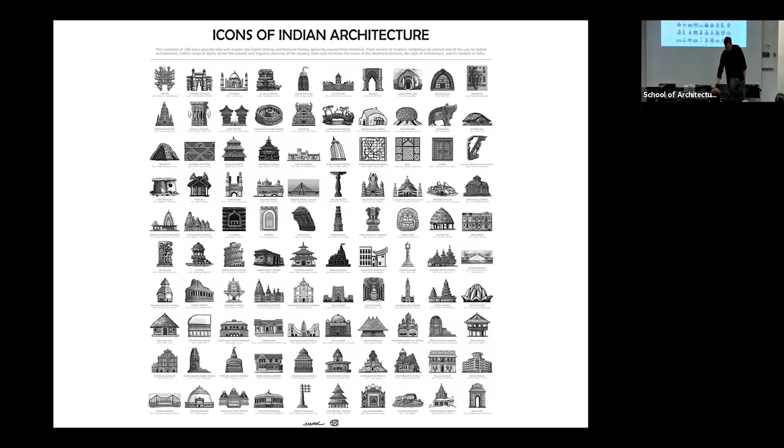symptomatic of development throughout the world. Really, I mean, it's not something that is peculiar to India.

And you're also asking yourself that in this context of urbanization, what is the mandate or what is the role of an architect?

To step back a little bit, I'm going to look at the role of the architect over time. In 1947, when India achieved independence, the architect was this kind of nation builder, a part of the entire project of building India.

In 1975, when the emergency happened, a lot of mandate was taken by the authoritarian figure of Indira Gandhi, who was the PM then. The architect and other professionals started losing some of that fire, that mandate, or that social will to be part of implementing change, because the state became extremely dictatorial.

Then in 1991, economic liberalization brought the market economy to India. India, which had largely been a socialist-driven economy till the 1990s, had its economic borders open up. With this inflow of capital, you end up getting an incredible rate of change. Impatient capital, as Rahul Mehrotra calls it, dictates a certain speed in the implementation of the global or economic project.

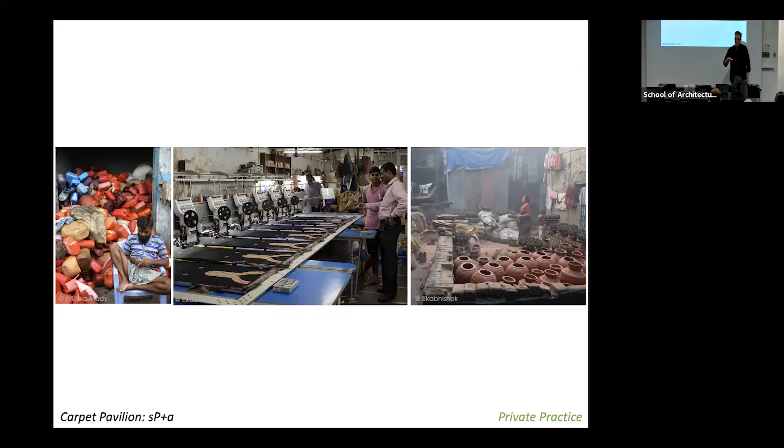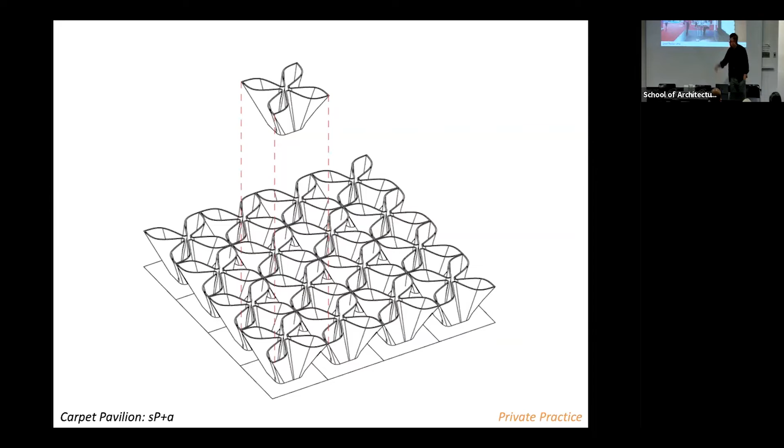The first of these is the idea of a traditional practice, where a client comes to us to do a project. In the case of this carpet pavilion, while doing that project we also looked into means of production that the city has, latent ones not necessarily forgotten but slowly disappearing over time. We worked with what is, in some sense, a kind of craft to create this pavilion, which uses waste carpet but also reinvents the life cycle of that carpet.

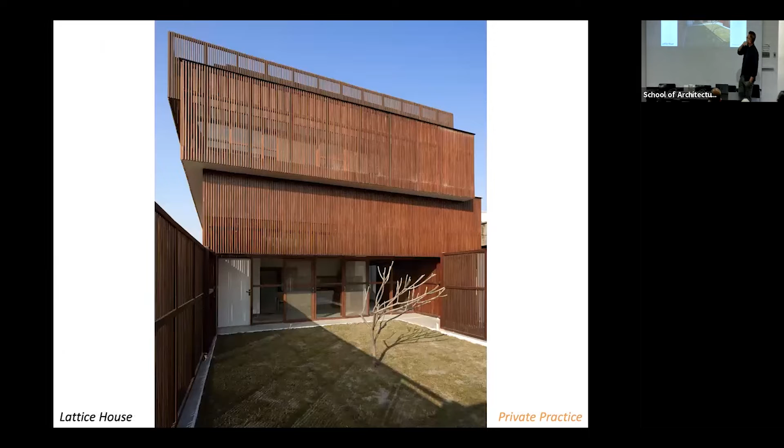Or in the case of a project like this, where we built a house in northern India in a peri-urban context, the architecture of the house itself becomes a means for us to start suggesting a kind of ordering of what seems to be an extremely haphazard edge to the city as it is today.

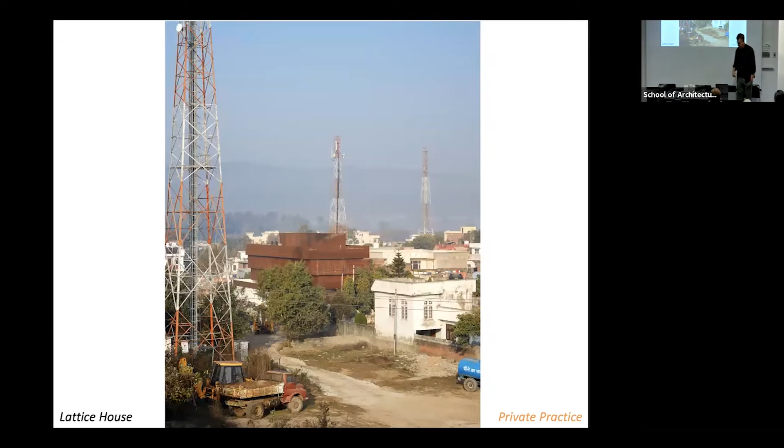The second model of practice we typically move through is this idea of a collaborative practice. In the case of this small temple that we designed, temples are actually extremely embedded in the cultural memory of the people who go to these projects.

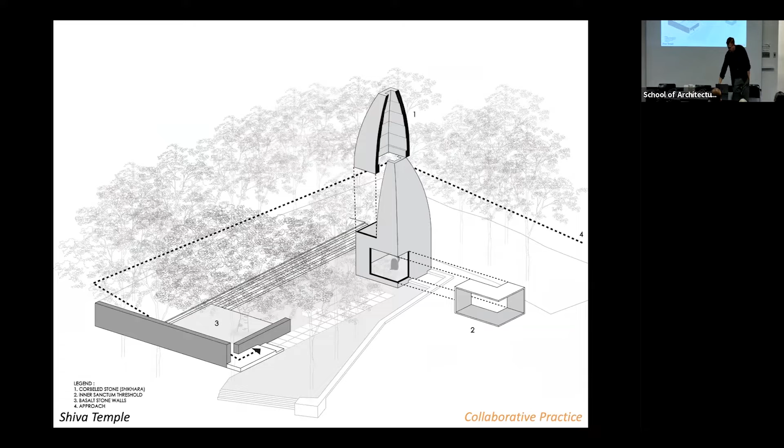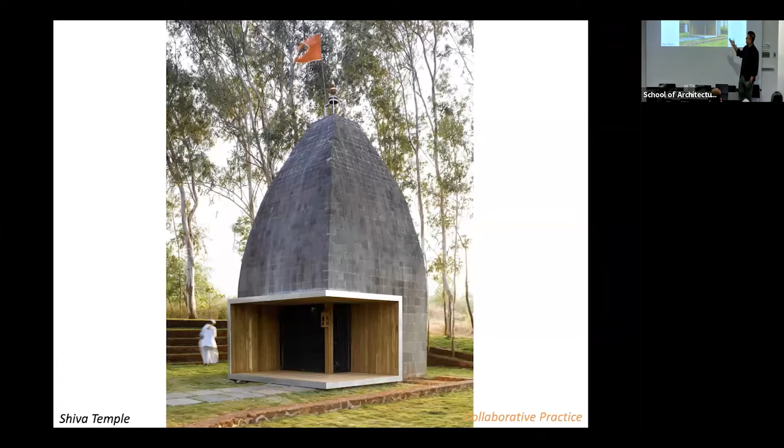Here we worked with a group of 3 villages to design and build a temple out of stone, using techniques that had been forgotten. We were, in some sense, editors trying to look at a model of design and build that would have very active involvement from the people who were going to use the project. The villagers actually built the project themselves, which took a little more time, but it also created a sense of belonging that would have been difficult to create otherwise.

The third model of practice operates through this idea of collectives. What we've done is structured a group of 6 practices that look at doing only public projects for the city of Mumbai, where many times this work is pro bono. We are trying to create another level of engagement that doesn't exist in the city today, where the government literally hires contractors to do city projects without any kind of design intervention.

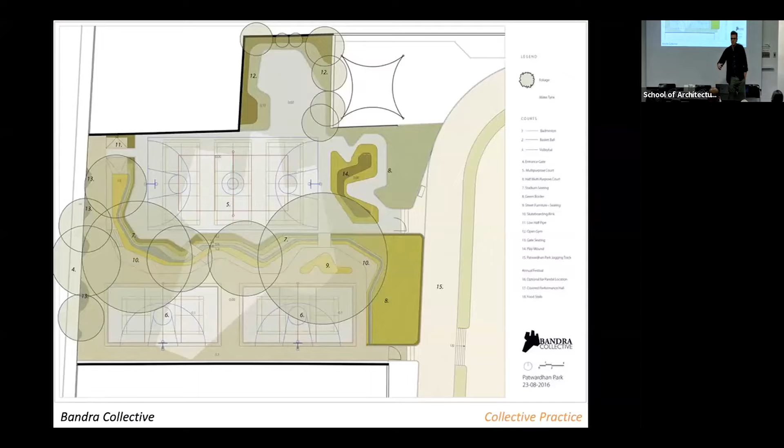So what we've been trying to do as a group called the Bandra Collective is work with resident groups to do design interventions like parks, but also to do advocacy projects where we look at infrastructure, for instance this massive coastal road being built along Mumbai's western edge that will completely cut the city off from its waterside, and to bring these images into public domain to build resistance against projects like this. That's the third model of practice, the idea of the collective.

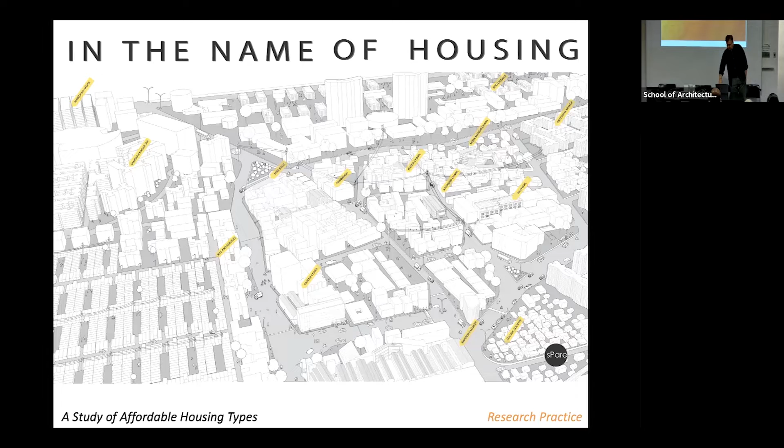The last model of practice is this idea of research as a mode to operate through, where there's an incredible lack of information on our cities. What we're trying to do through this project is address this idea of housing and affordability, and how there already existed certain models of housing in Mumbai that have been forgotten or glossed over, and to try to learn from those models and bring that idea back in a projective sense to look at the design of affordable housing going forward.

So those are the four models of practice, but it's not like these models operate individually or are siloed. They also constantly inform and learn from each other.

The second part of the presentation talks about projects that lie beyond the urban, in some sense. Lefebvre said this back in the 1970s, that however disconnected you might be from urban centers, you're still part of urbanization networks. So that's really interesting.

But what also happens is, as architects, our only intervention within this kind of context is through projects like second homes and farmhouses, because the rest of the country—and now India is 35% urban population, only 35%, 65% is rural. And if you look at what that means in terms of development indices, there is a huge disconnect.

Yet India is one of the few countries where it's mandated by law that companies above a certain scale must compulsorily spend a certain amount of their profits as CSR, corporate social responsibility, investing that into social projects to improve society. All of this money is put into use, but it's not articulated in a way that creates systemic benefits.

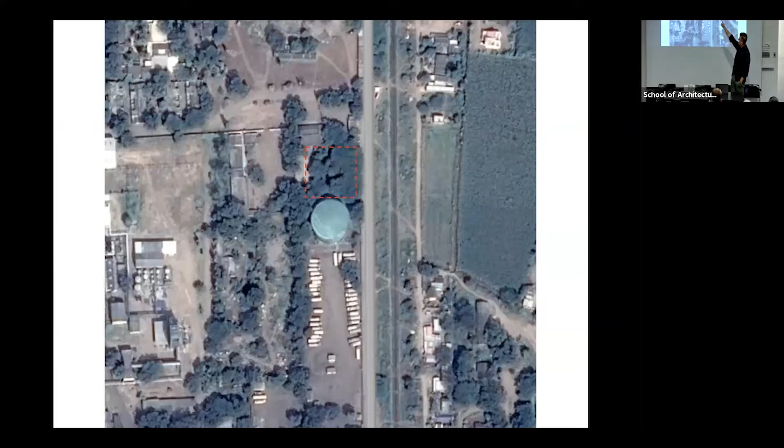While we were trying to develop an architecture for this site, because of the dense foliage, we were also trying to see if there were clues that we could pick up on to create an architecture that, while being internal inside, also visually links you to the foliage of trees outside. So this is a small guest house close to our site that we experienced, which led us to this idea of reversing the insertion of the architectural section within that space.

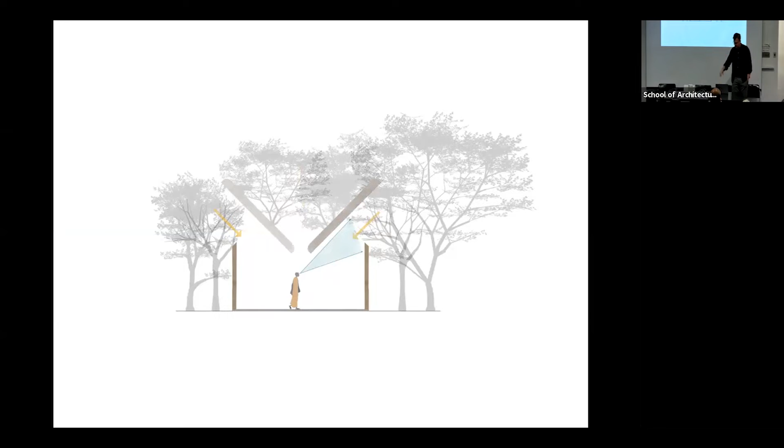As a planning idea, it's very simple. It's really just a series of two halls, one a meditation hall, the other a skill development center, a little admin block, and three dormitories for teachers to stay in. There are two courtyards that structure the entire project.

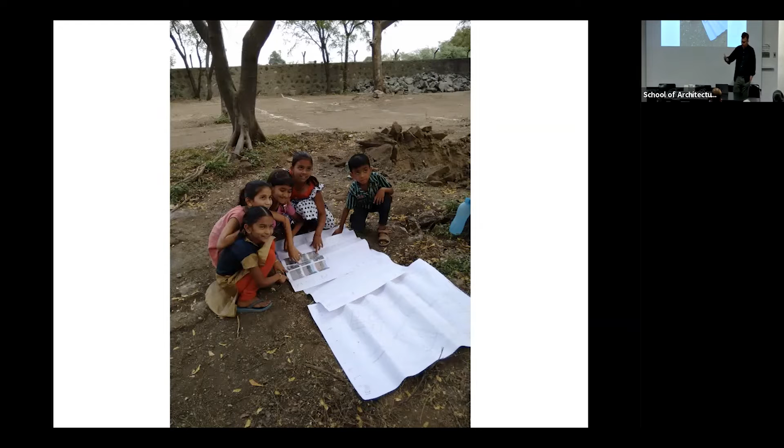We worked extensively with the local community to show them what we were planning to do, and had a lot of back and forth with them. We brought in Hunnarshala, a group that won the Curry Stone Prize here back in 2008 or 2009. They essentially train local communities to work with local material to build, and that's the kind of material ecology of the project we developed with them.

We ended up using waste stone dust from a basalt quarry close by, along with fly ash from the plant, to create walls that were rammed stone dust walls. So they are basically volcanic stone dust walls rammed in place to create a new material which we hope will become systemic for construction in this area.

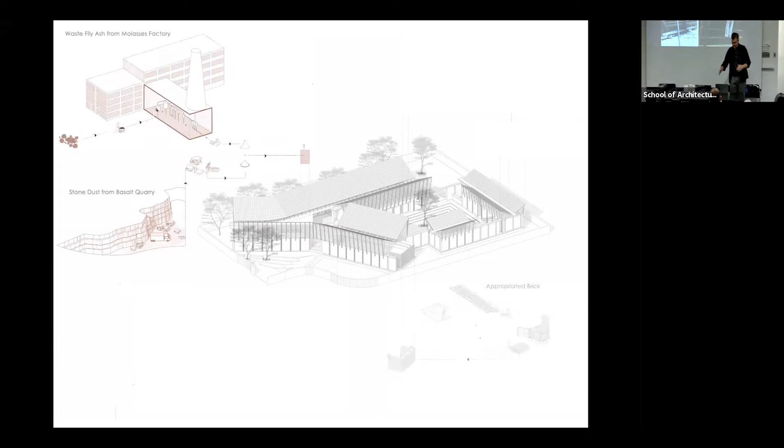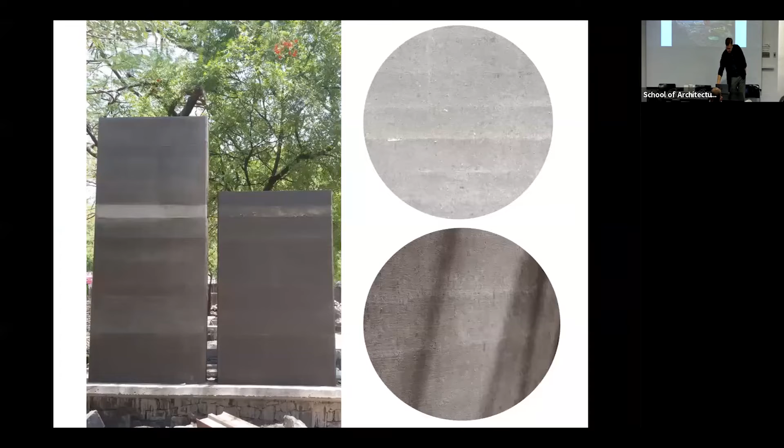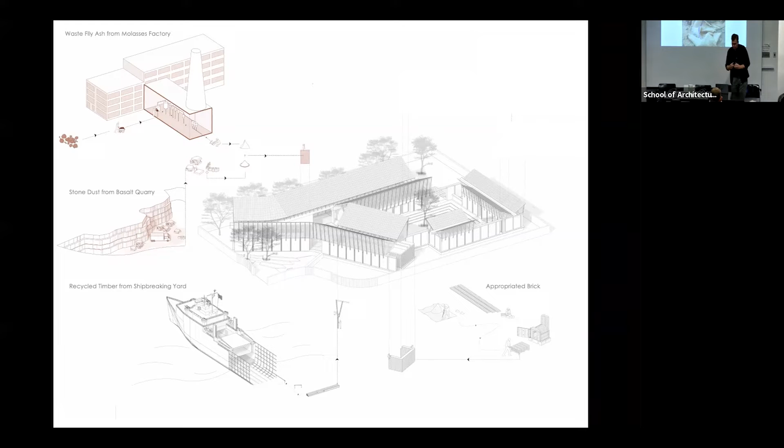These are images of those shipping vessels that were broken, and the wood that came out of it. That's the wood now on our site being structured into a roof, sitting in the middle on the gutter. The entire underside of the roof is made of old jute bags wrapped around a twig and mixed with mud to create rolls of mud that become insulation layers underneath.

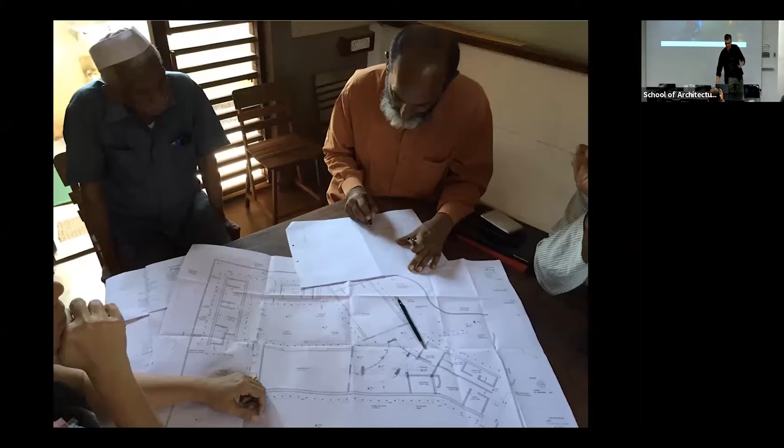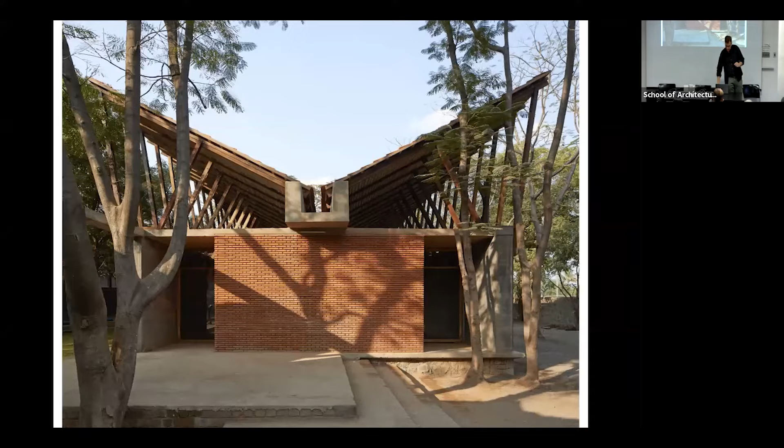That's the concrete gutter sitting on the brick pier. It's a very clear structural diagram, but what it allows us to do is also carry all that water away to harvest, because this is an area with very little rainfall.

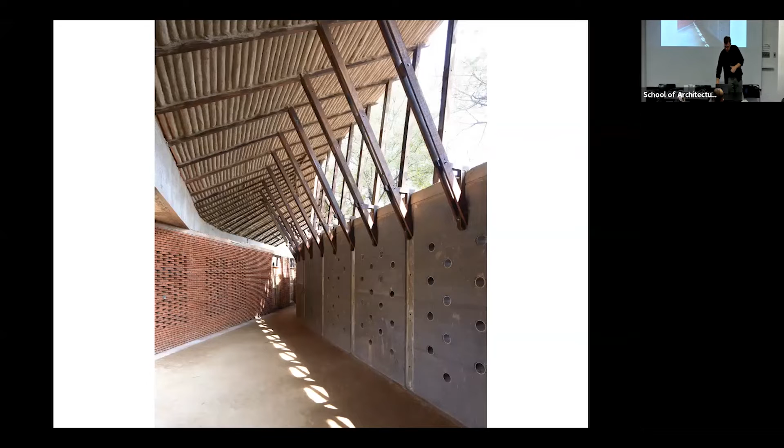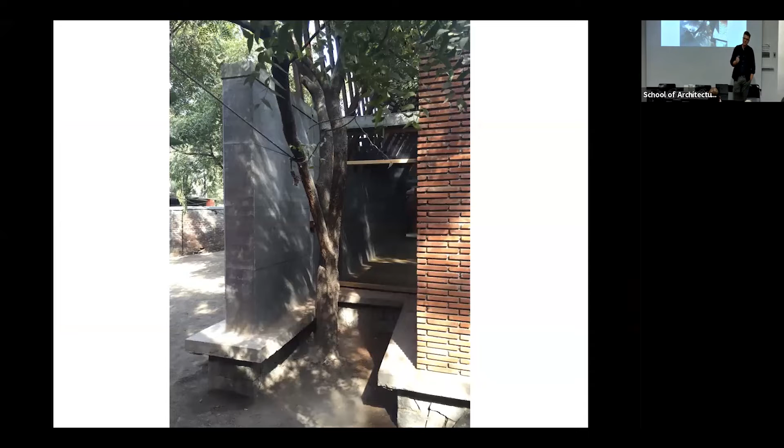What we've also done is that while the structural diagram is very strict, it still allows us to respond to trees that sit within our site, which are the most important part of the beginning of the project, because the trees obviously were there before we were. Jetavan is also a kind of holy grove in Buddhist mythology, and we tried to work around all these trees.

And they manifest in various places. The entire structure really responds to the presence of those trees, and you can see how some of those spaces are, and how that entire courtyard really becomes a kind of social space for people to use at various times of the day.

The second project I'm going to show is a library we've done as an extension to a small school, again in rural Maharashtra. While building this library for children, we were trying to think about what children relate to more. Is it a vertical building or landscape? I mean, the answer was the fact that even as an adult, if I was to look at a berm or a mound, my first impulse would be to climb on it.

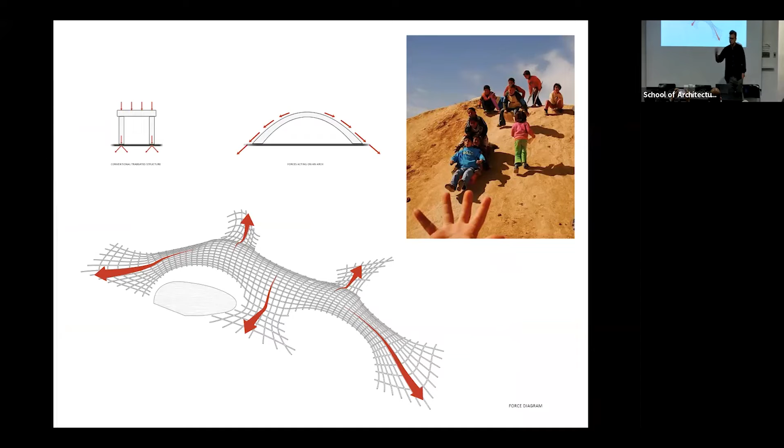And we set out to do exactly that. We set out to create an architecture that was also simultaneously landscape. But to do this, we ended up going back to 16th century Spain, the Catalan tile vaulting system — Guastavino built all of that. And then we looked at how Eladio Dieste in Uruguay was also doing these tension ring details, which allowed us to do these compression structures in brick. Then, using form-finding software from ETH Zurich, we were able to calculate the compression in this building. And finally, using local material in Maharashtra, we were able to build this project in India.

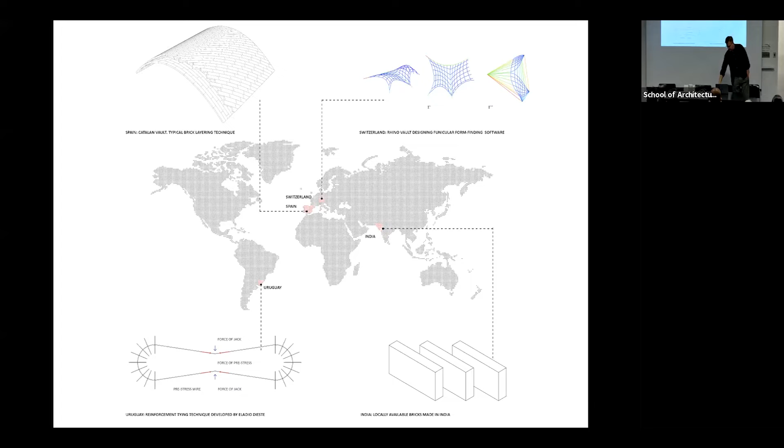So the point I'm also trying to make here is that the global and the local are no longer in opposition. They don't need to be. We already sit on knowledge networks now that allow us to use knowledge systems that might exist in different parts of the world, but could make the local richer if we think about it that way.

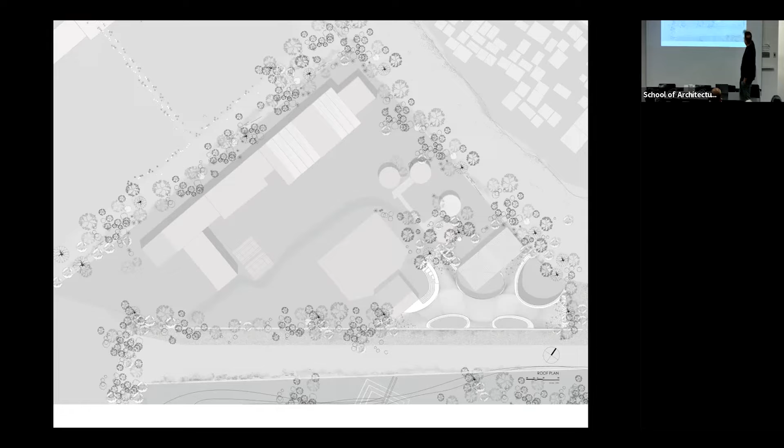And this is really a site plan of the school. This was where our site was located. What we were trying to do was imagine the library to be really a kind of crossroads for students from the upper part of that school to move to playgrounds that sat on this lower edge.

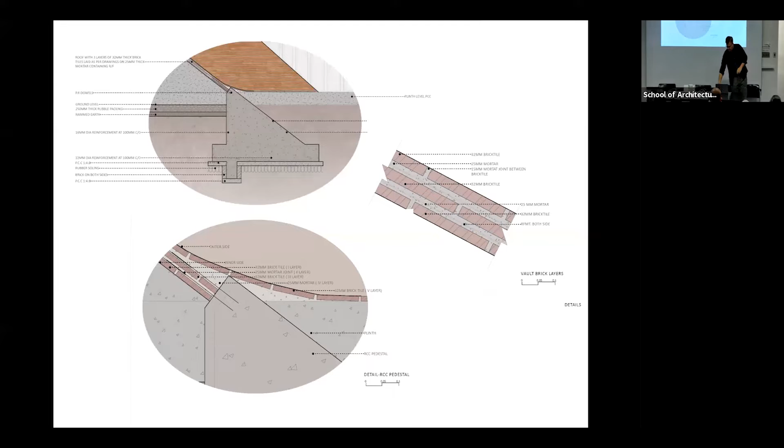So we really were trying to see if this building could also be a pavilion of sorts that people could move through. These are just some drawings of that. It's really a simple construction technique of three layers of brick tile that are always in compression. And these are some mock-ups of the initial project with testing.

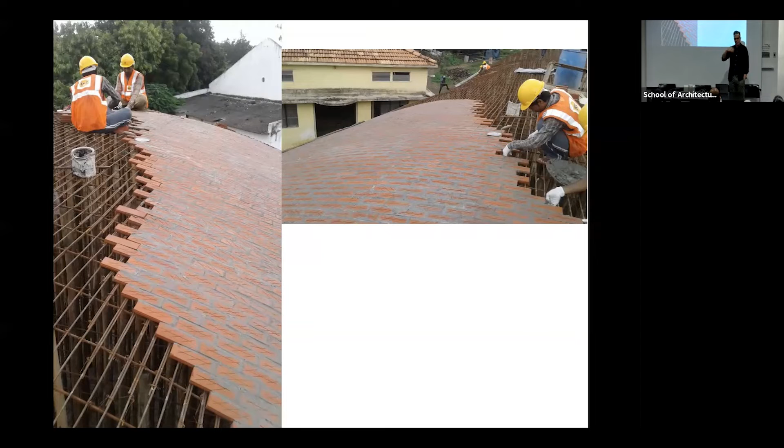As you might know, when you do a curved structure, the most expensive part is the formwork. What we did here was actually use rebar as formwork — once our first layer had settled, the contractor removed the rebar and used it to construct another project at another location. So our formwork cost was zero. That's really, in some sense, the frugality that becomes extremely important when building in a context like ours. And this is after those rebars were taken off.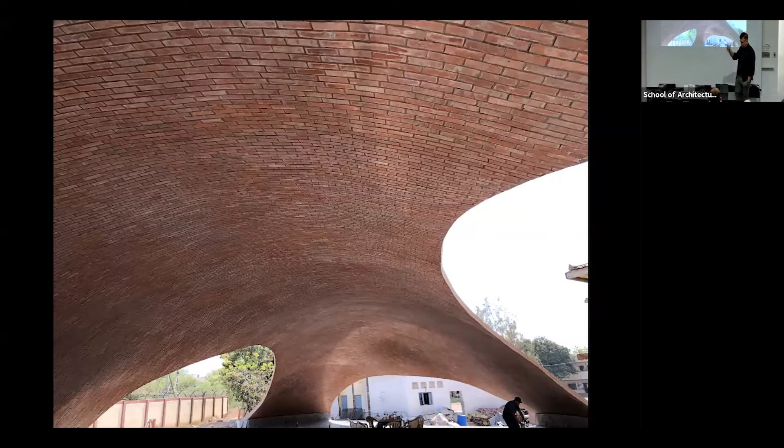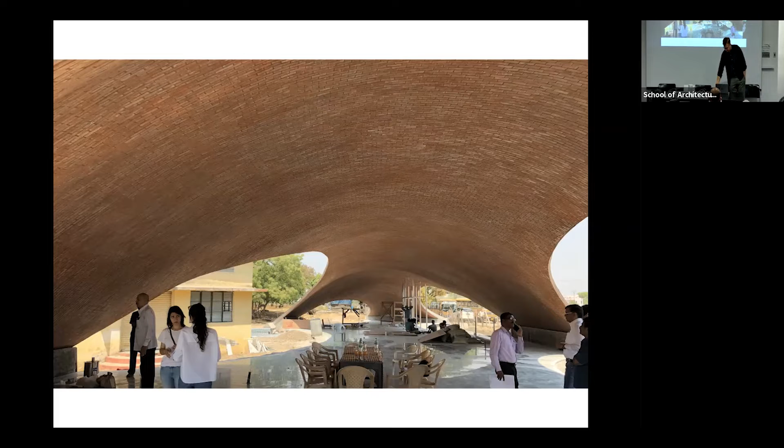The shell is 150 feet long, about 25 feet at its widest, and 4.5 inches thick, without any steel — completely in pure compression. So the building really becomes a kind of landscape project.

What you see here in the interior is that the windows were designed in a way that allowed us to create natural ventilation within the building. The upper layer of all the fenestrations is mesh, so it allows air to move through, and the lower layer is glass. Also, because we articulated the edge of the windows, we were able to use thinner sections — so we used less material than we would have if the entire thing was one continuous line.

Also, because it's completely in compression, we couldn't anchor any of the windows to the top, so all of the windows are actually anchored to the ground. If you look closely at some images, you can tell there's a slight gap between the window and the entire ceiling.

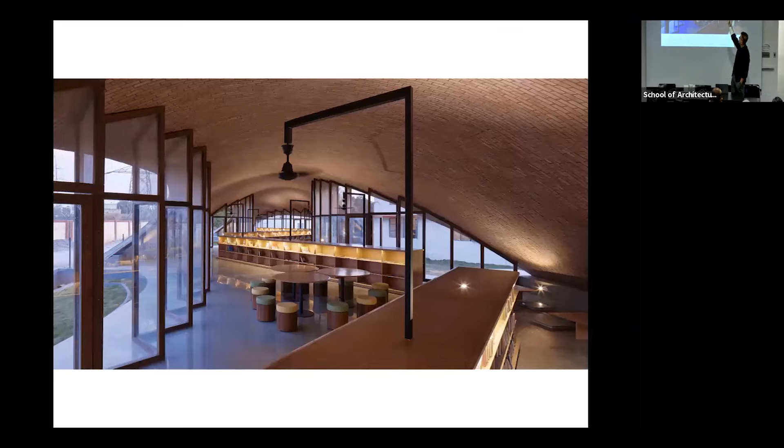Various scales of spaces for kids to sit in and read. And also things like the fan are built off the book stack, because we didn't want to touch the roof of the building. And you can see how that works.

The third project I'm showing within this category is another temple that we actually built. It's again in rural South India, built within a context that is agrarian, but also has a big steel plant and cement plant there, for which they're quarrying. You can actually see these little quarries with water accumulating in them, because the quarrying process itself needs water to cut through the stone.

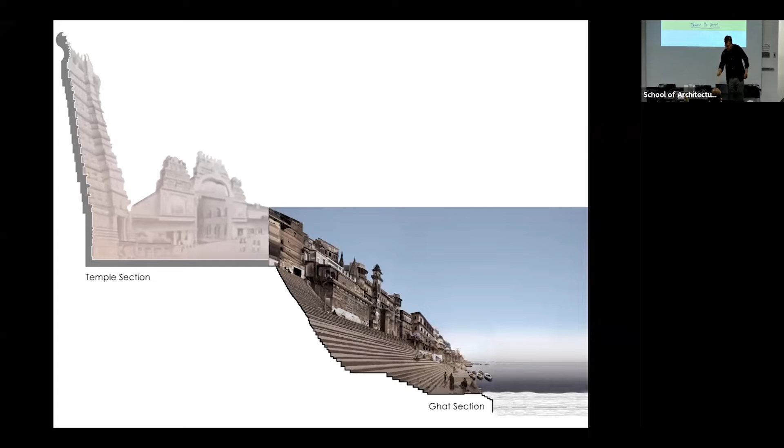So what we were trying to see when we were designing this temple was if we could use that water that was being generated as a byproduct, just evaporating within the body of the temple. We also went back in history to see how this relationship between water and land within traditional temple architecture in India is very critical, whether through the idea of the ghat or the kund, which is a step water body. So we were really trying to see if we could begin with this idea of that step between the water and the land, and see if that could become the architecture of the temple itself.

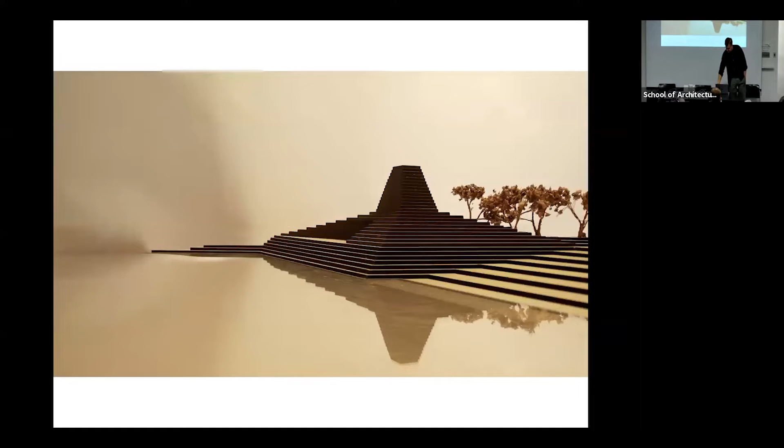In terms of a plan, it's really very simple. You enter towards the left. There is a traditional east-west axis in which the main deity sits. There is a smaller deity that sits towards the western edge, and on top there is the priest's quarters with a little kitchen where the food is cooked to give to all the devotees who come through this temple.

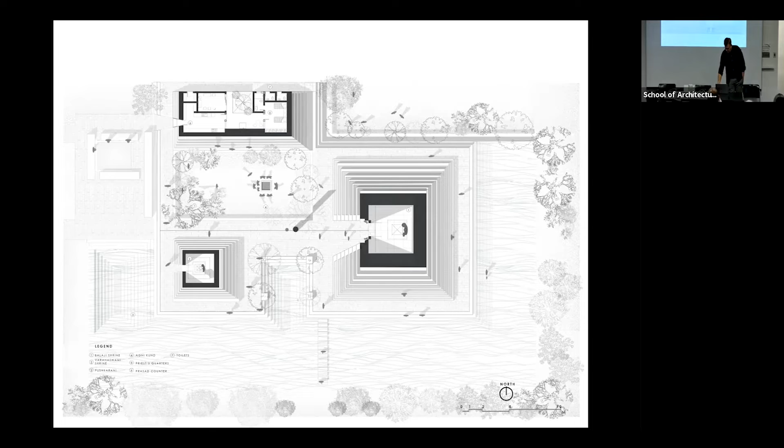And while we were doing that, we also structured the low-lying area around our temple project to become a receptacle for all the water that was coming out of the quarrying process. So that water is basically used to recharge groundwater in this particular area, and whatever excess water comes out is then diverted to the farmlands around the area to help the farmers irrigate their crops.

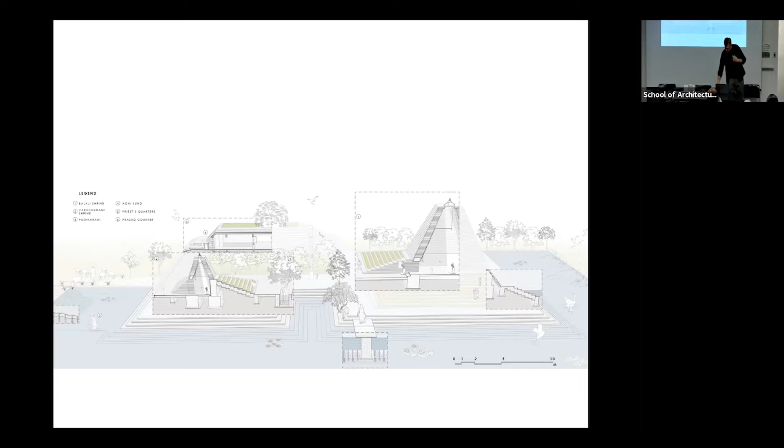So again, the program is really just a very simple temple project, but what we are able to do is add layers of other programs that are not directly related to the temple program itself, but have a relation within the context that we are building. It allows us to create a kind of connection to the people around the project that would be difficult for us to do if we hadn't added that layer.

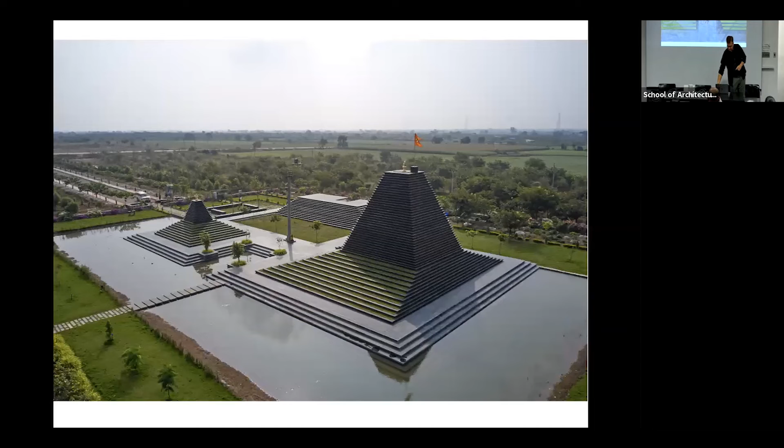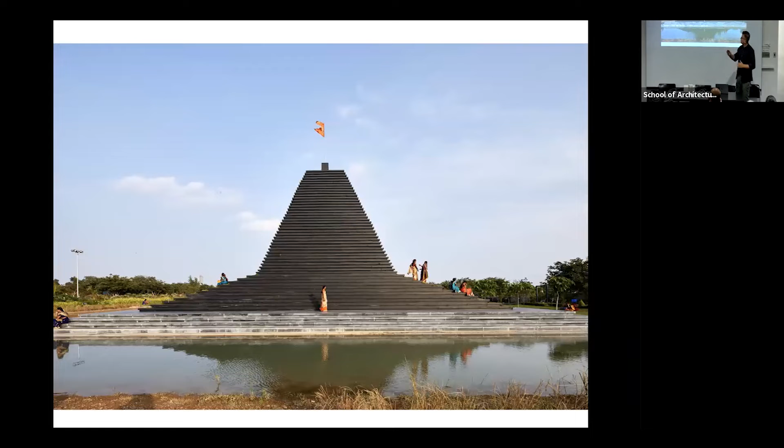And what Vladimir actually said in the beginning, it's really important for us to be able to let people take over the project. Finally, when you look at temple architecture, there is a certain distance that the user has from the deity or from the object. But what we are also trying to do by introducing these steps is to be able to, in some sense, change that distance, to create a much more intimate experience between the user and the actual project itself. So it also becomes a kind of amphitheater looking outwards.

This is a kind of drawing of the project where we were also trying to talk about how these cultural elements of the temple and its planning really become a means for us to connect back into the landscape through the device of water and its cycle.

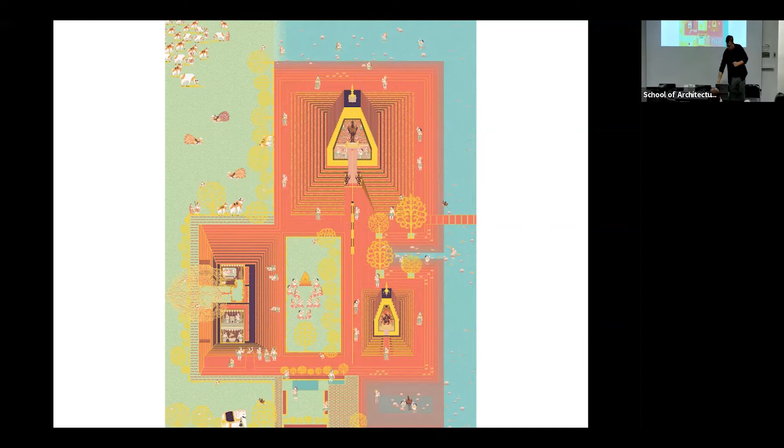The last bit of my presentation looks at the city itself. And as you know, there have been so many conversations on the city. Rahul's talked about the kinetic city. There is Richard Sennett's talk about open cities. There are some books on Bombay, like Maximum City, that talk about the kind of dynamics of what makes a city like Bombay operate. And while there are these incredible definitions of what Mumbai could be, there is also evidence of various kinds of programs that are emergent, that talk about the dynamic of a city like Mumbai, separate from a kind of top-down planning concept of what Western planning typically comprises.

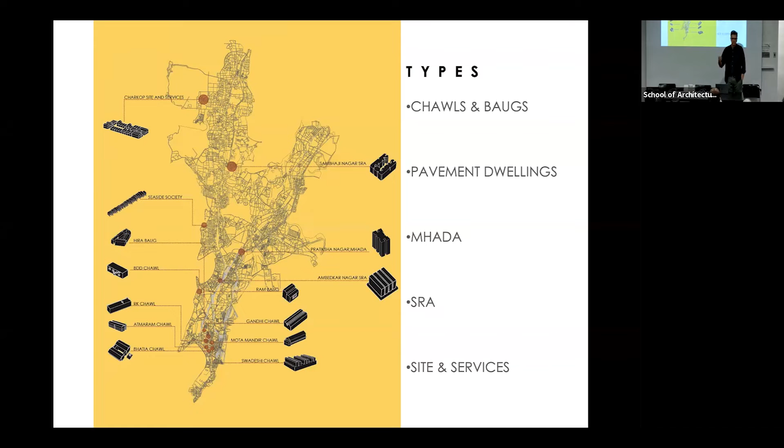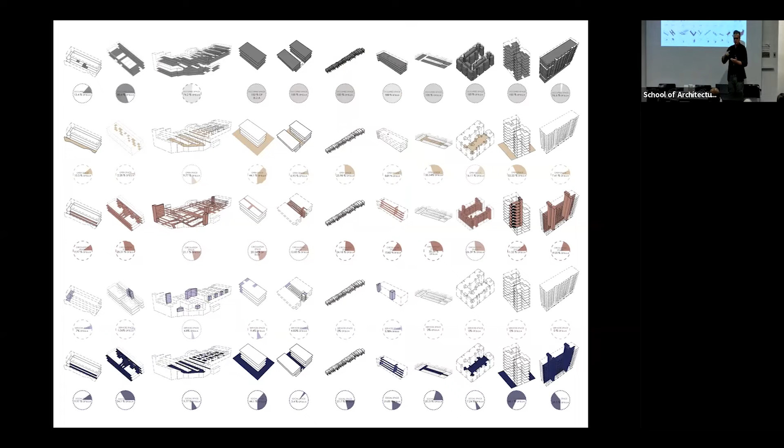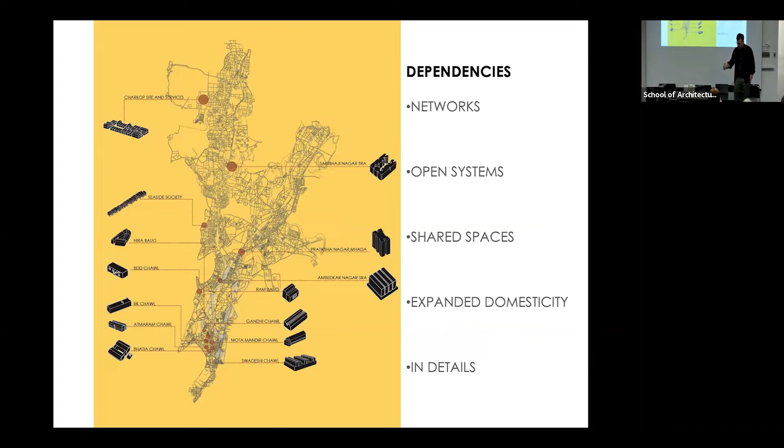To look at this notion of housing, what we started doing was going back into the history of the city to find what were the kinds of models of housing that already existed for the past 150 years, and to see if we could dissect them, analyze them, look at them through the metrics of social space, of movement, of unit size, of unit change over time, to find commonalities that suggested a new way of looking at affordable housing within Mumbai.

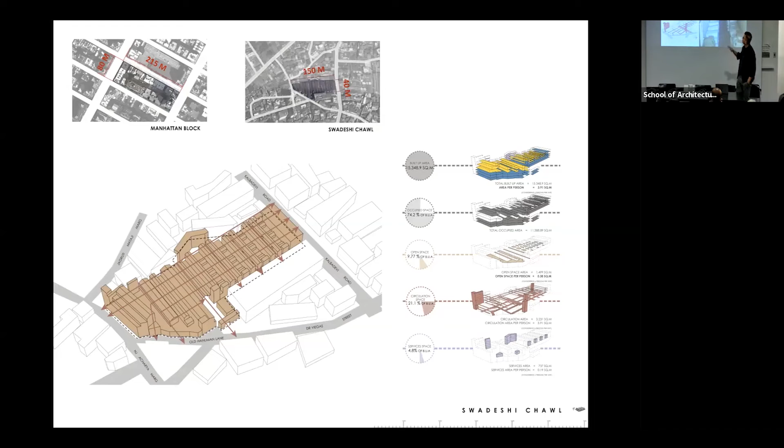Some of these projects are incredible. This is a mixed-use project, roughly 3/4 the size of a Manhattan city block, owned by a single owner. It's got a market street at the bottom and residential units at the top. What's interesting is, as opposed to other similar mixed-use developments in the city today, here the streets actually allow you to shortcut from one part of the city to the next. The city does not stop at the edge of the plot. It actually continues all the way through.

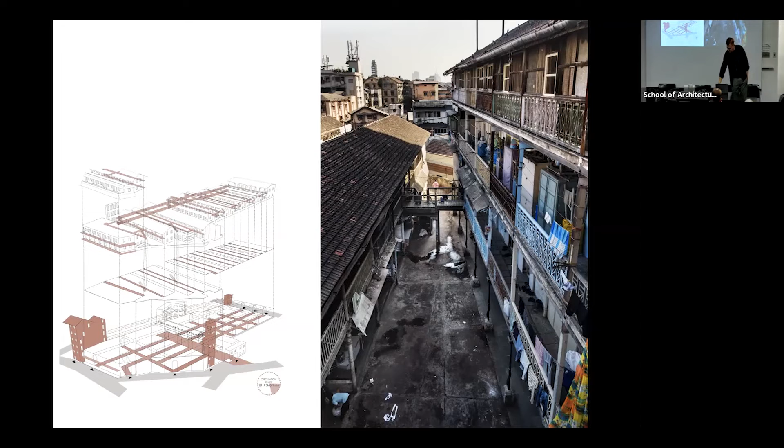And above, you actually have these residential units that have courtyards in between them and bridges that connect you across. Built in 1896, 1898, it still survives today, and it's an incredibly beautiful project, but phasing out shortly. So the idea of networks was important in that project.

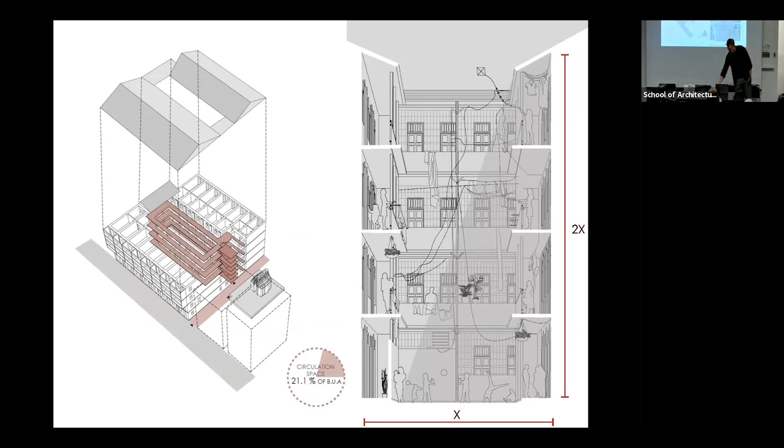In this project, which is a very simple courtyard unit with corridors on both sides and units across the corridor, the critical part was that people spoke about how, when they stayed in these units, despite having formal housing with an elevator in another location, they still preferred living here in a walk-up, because if they had a problem, they could call out to anybody, and people from any floor would come and help them. This sense of community was something they clearly understood was not available in new developments within the city.

We also found this idea of a proportion, a width-to-height ratio, that allowed people to communicate easily across that courtyard. That was extremely important to develop that kind of social infrastructure.

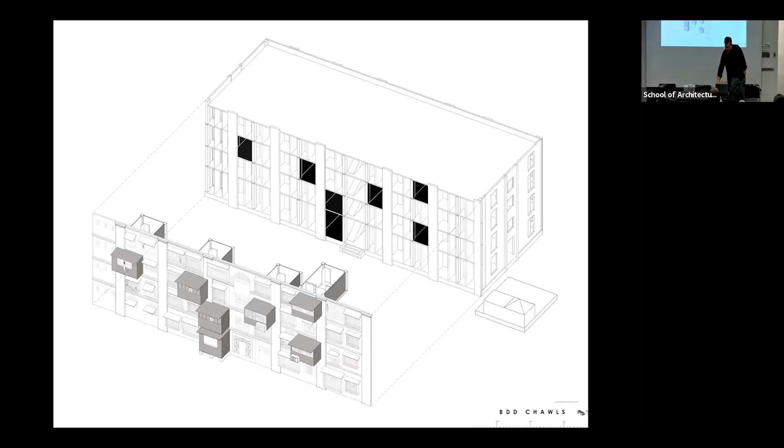Or in the case of this housing that was built by the state, over time there has been a lot of change in the housing itself, where people have gradually extended their homes, coming outwards, adding units, such that the entire facade of the project is actually a study in almost an architecture of extension, of being able to accommodate new programs that are added. So what you actually see here are new rooms that were added to an existing unit inside by the residents directly. And if you think that this is very sporadic or organic, it's actually a very structured and precise way of creating additional programs.

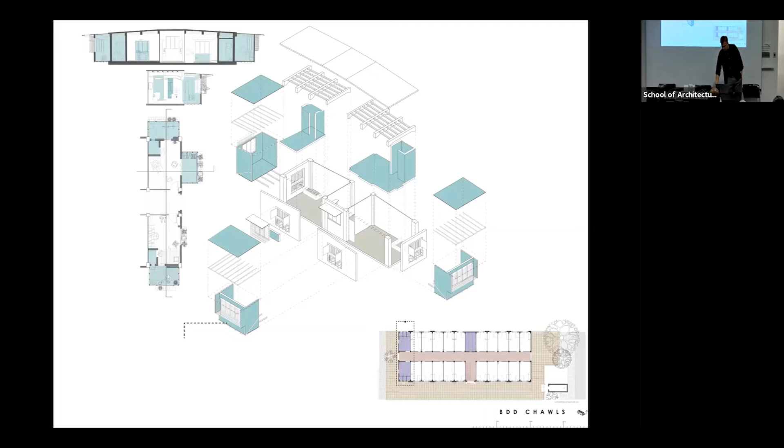And so it's this idea that housing also needs to be extendable. It needs to—the systems that we put into place should allow for this kind of change over time.

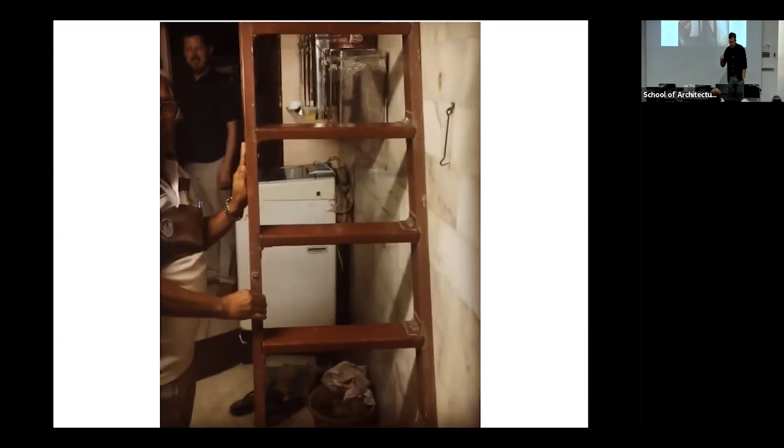And finally, it's also about the small things, the little things, like this little ladder detail that's about 100 years old. It has just 2 hinges across this piece of wood, allowing the ladder to completely fold against the wall, and whenever you open it up, you can access a mezzanine. So it's this kind of attention to detail that is important when we start looking at the architecture of housing, especially small homes.

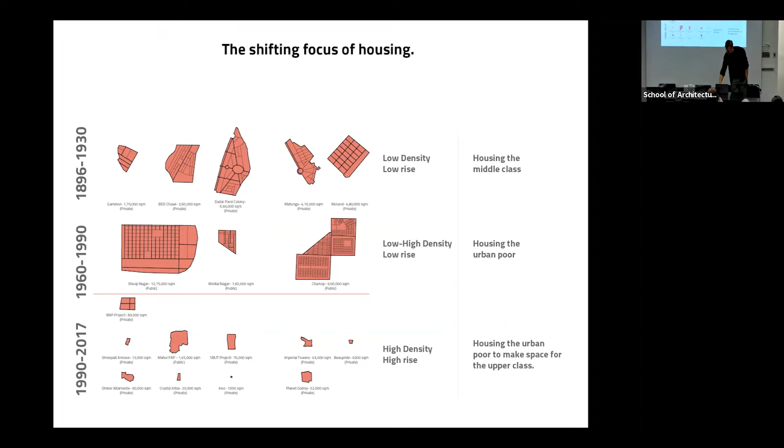But at a macro level, there is a clear shift in the focus of housing in the city, where project scales are changing. The attention to who you're trying to house is also changing, and who loses out in this is typically the lower income groups. What we're trying to dissect here is what is the building code that actually allows for that kind of housing to be built.

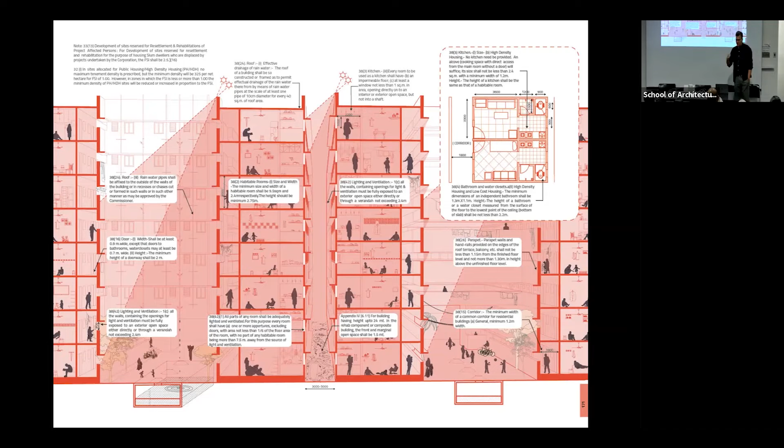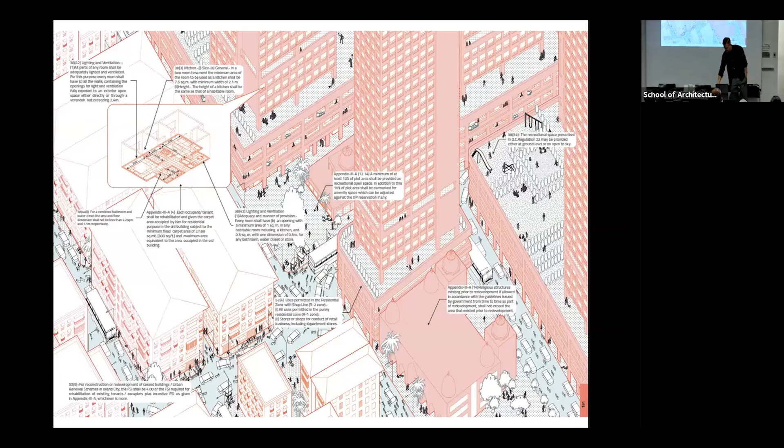So our new research looks at the history of Mumbai's development over time through its building code, to see what kind of semantics are in operation to create certain kinds of architecture within the city. This is Decoding Mumbai. The book actually comes out in a month's time.

So that's really the kind of research. The notion of research, as far as the city is concerned, is also a means for us, as architects, to inform ourselves better of ways to intervene within the city. And then to start looking at the architecture of a few projects.

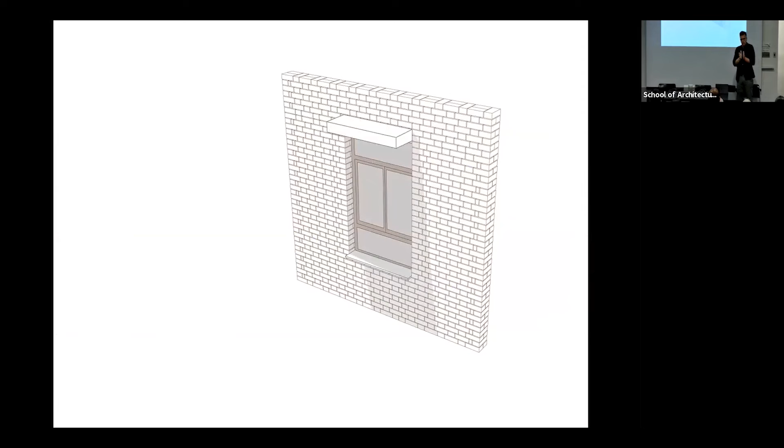But what we were trying to see is if we could start looking at that edge to become performative, to be able to create an architecture that responds to climate, where the walls could corbel outwards to take the weight of the sunbreaker. So the facade is not just a kind of separation, but it's also a means to negotiate climate. And there's an entire system to do that.

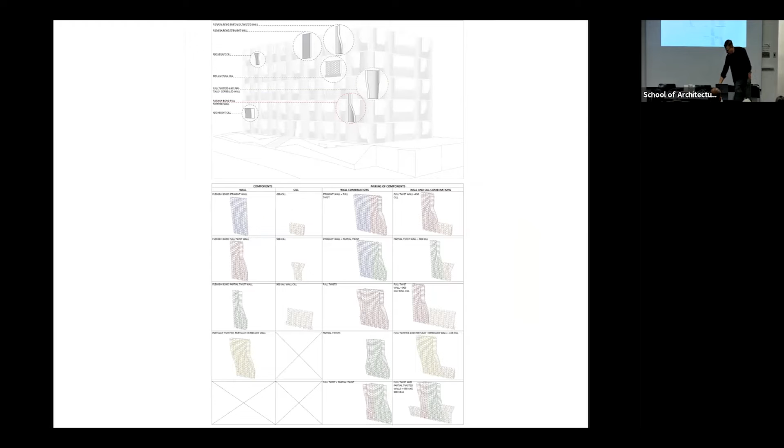We drafted all of this on the computer. We did our exercises in terms of how much that corbel needed to be, but yet we have to construct on site. And you're working with masons who don't read drawings like this.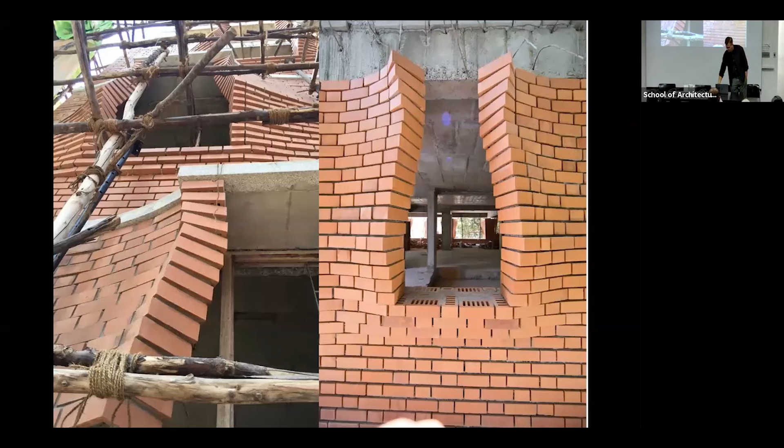So what it meant was we actually had to design low-tech tools. These are simple wooden templates that allow the mason to corbel the brick just by the right amount, and be able to work on the skin in a way that allows you to do that. So you can see the brick corbelling to take the weight of the sunbreaker.

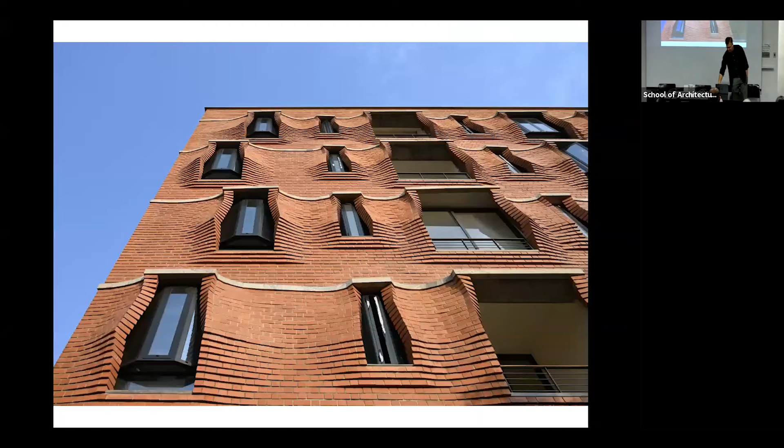So while the project is about the way the wall corbels and takes the load of the sunbreaker, it's also about simply looking at the design of the tool. So it's as much about the design of the tool as it is about the design of the building.

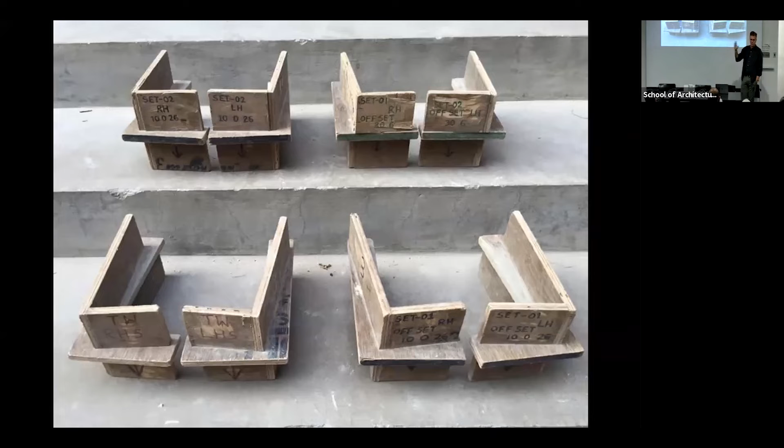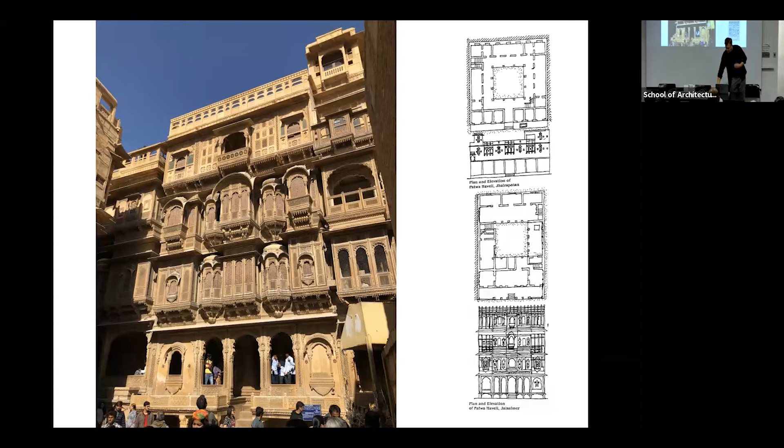The last project I'm going to show is another project in a tier 2 city in Western India, where there is already a very strong architectural presence. The architecture of these screens, of these lookout balconies, is already something concretized through cultural memory and artifacts. And if you were to trace the development of that form, it comes from a small rural house in the hinterland.

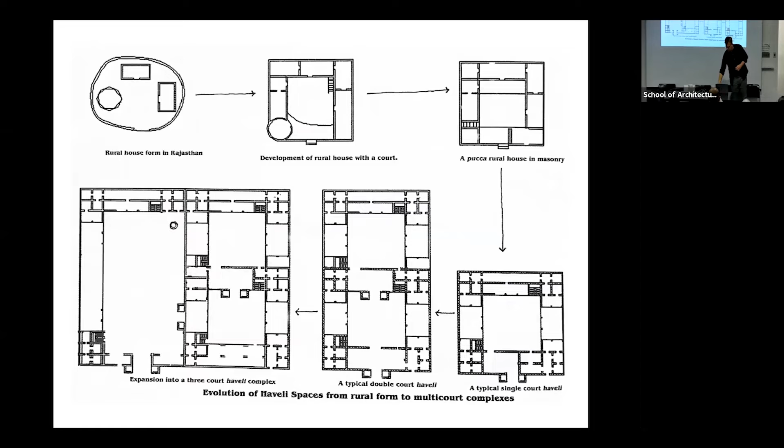Which over time changed into a courtyard format, so that gated enclave then turns into the final image of the project you see. That creates an entire kind of cityscape that is extremely variated and rich, built out of stone.

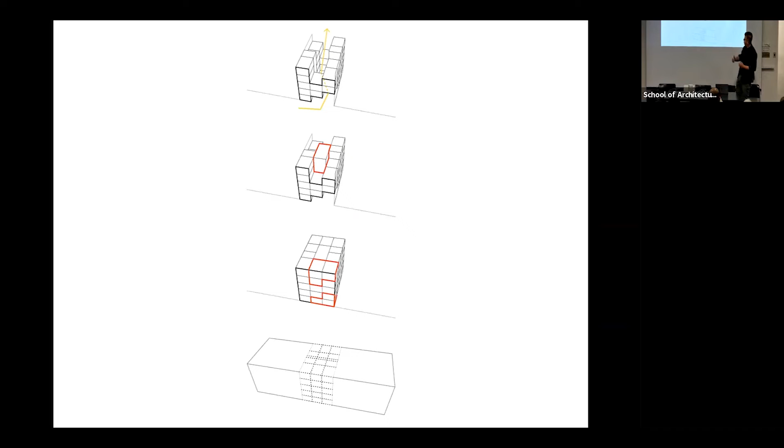But what we were trying to do, in some sense, when building these student hostels, was to see if we could create porosity within that extremely dense fabric, and to see if the section of the building allows it to actually breathe.

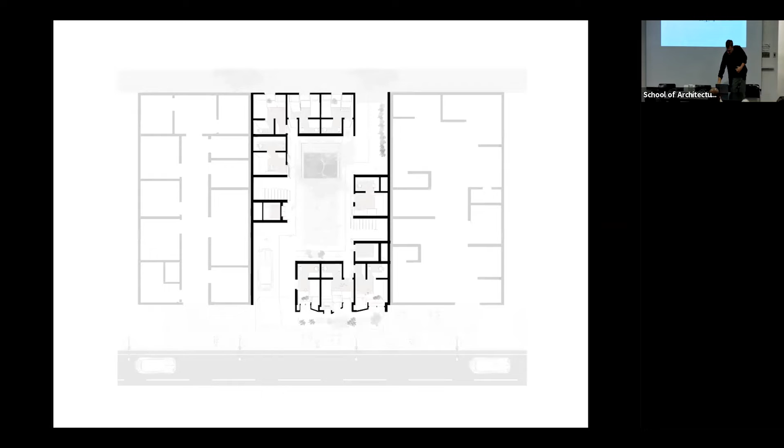What you see here are multi-level plans, but you can see the changing porosity of those plans as we keep going higher. And that is the final project.

Again, working with local stone to develop these lookout balconies and screens that allow cooler air into the buildings, and creating additional terraces that allow students to congregate in these outdoor spaces.

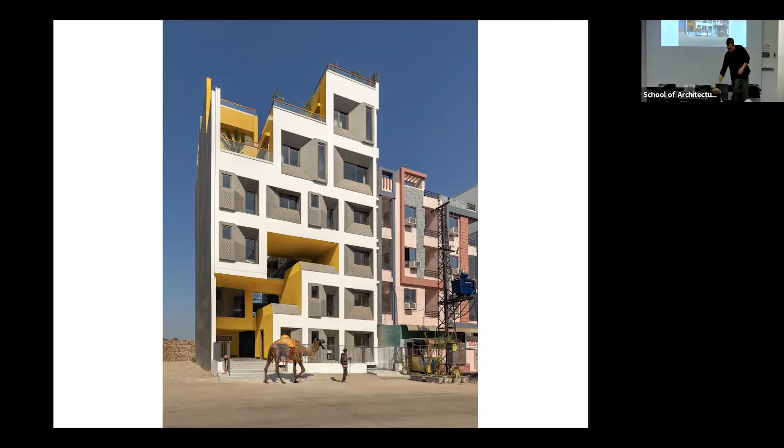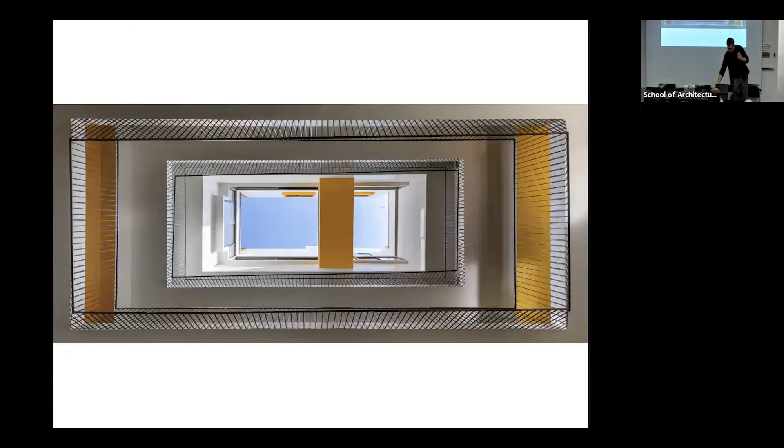And as you enter, that's the central courtyard. There is a bridge that connects at some level above. But what's also interesting, and this is something that escapes documentation in the plan, is that there is a sectional connect of people.

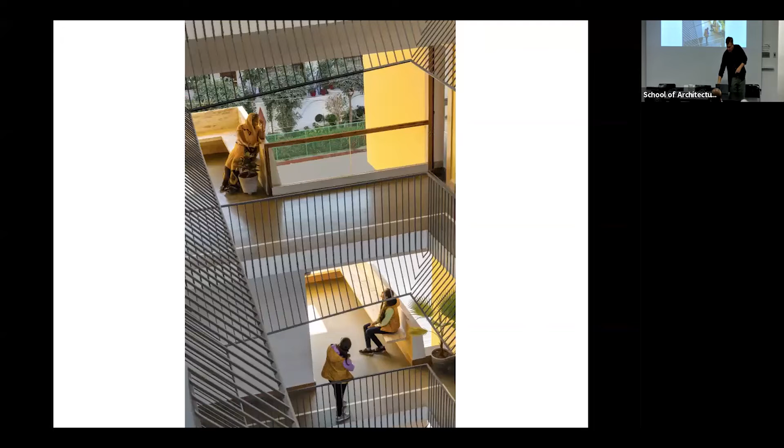Being able to communicate across floors within our cities as well, where the outdoor is extremely networked or connected to the interior through people and their interactions. This connection is something we were trying to work through in the building as well.

These are some images of the hostel rooms and the light that comes in through the jali, and the way that building sits within the new fabric. So it's really this juxtaposition of multiple programs, multiple influences, contexts that are not necessarily geographically locked, but they're also able to open up conversations about material, about time, and geography.

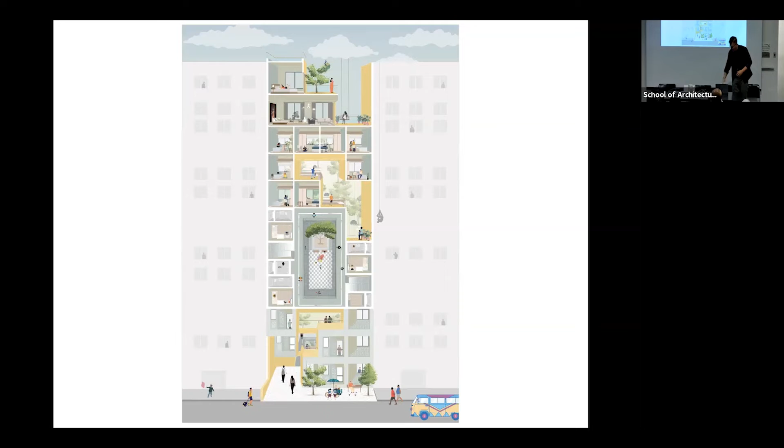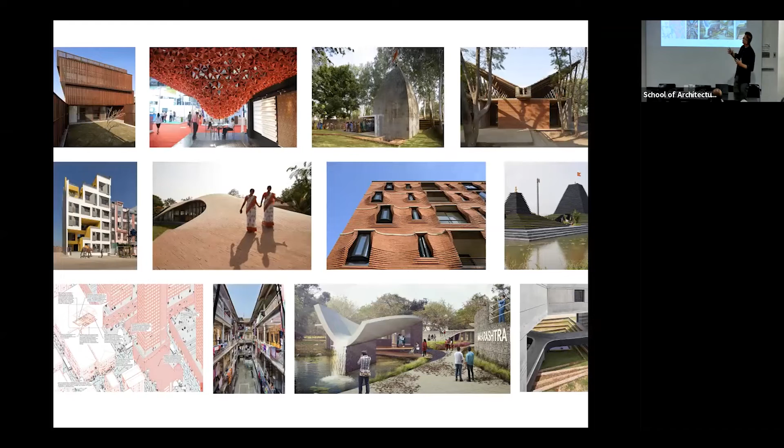So I'm just going to finish with the last couple of slides, which is really where we started off, or what I was trying to put together. I've just taken a few projects, but the responses, in some sense, come back to the title slide: Is there an Indian way of thinking?

This is actually an essay by the incredible writer, philosopher, historian A.K. Ramanujan, who talks about how there cannot be a single monolithic way to imagine this idea of India. By re-emphasizing a different word in the same sentence, when you say 'is there an Indian way of thinking,' you're also asking simultaneously 'was there an Indian way of thinking.' And 'if there is an Indian way' also questions the singularity of that effort.

So what he basically puts into play is that the only real question of identity should actually be replaced with this idea of diversity—that the monolith is no longer operational. It's really subjectivity, and the sum of the parts that in some sense are greater than the whole. Thank you.

Okay, so let me just try to encourage you to ask questions. Before you think about questions, maybe I should ask something.

I think it's important to realize that architects definitely work in very specific conditions—there is local culture, local climate, and even politics involved. I want to ask you—you didn't really touch on this, maybe you could explore it a little later—some of the questions of the specific designs of your projects. But before that, maybe you could talk about how you go after projects. Where do you get projects? You don't have to talk about cases when it's a family member, a relative, or a friend, but how do you go after other kinds of projects, more public projects?